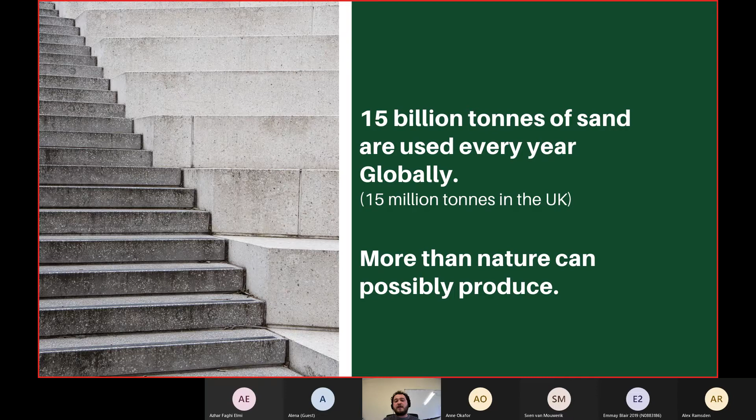So just a little bit about the two big picture global problems that we're trying to solve. The first is sand usage, which I'm sure probably some of you are aware of. The rate at which we're using sand that is suitable for construction is just far too much, and it's actually more than nature can possibly produce. So the world is actually, in fact, running out of sand, usable sand for construction anyway. So alternative materials are having to be sought after.

And a much more well-aware problem globally, and especially in the UK, we kind of see it everywhere now, is the problem of plastic and the fact that a lot of this plastic, in fact 91% of it, is still not actually recycled. And this is for numerous reasons. It can be that the plastic itself actually isn't recyclable, mechanically that is anyway, or that it's not desirable. The waste management companies have other streams of plastic that are worth a lot more money, so tend to focus on them.

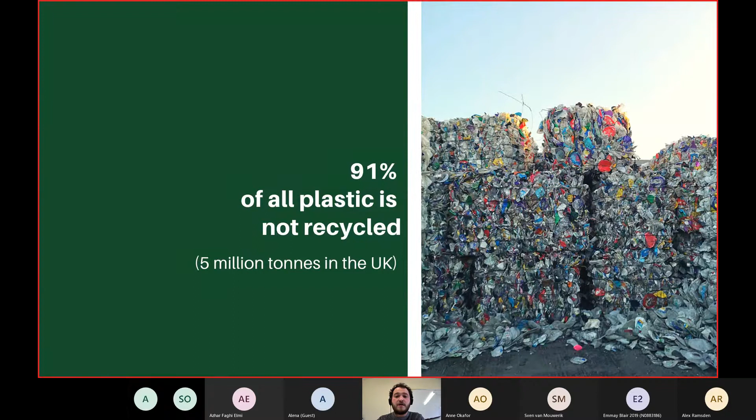So what we as Plastech try to do as a company is we take these sources of plastic that are either unrecyclable or undesirable to waste management companies, and we transform them into a material that can replace sand in concrete. And why you would want to do this, other than obviously just trying to look at uses for plastic, is that it actually improves the properties of the concrete. So it lightweights the concrete, it can severely reduce the carbon footprint of the concrete, and also add thermal insulation. And the process that we actually do for this, we have patent pending status on.

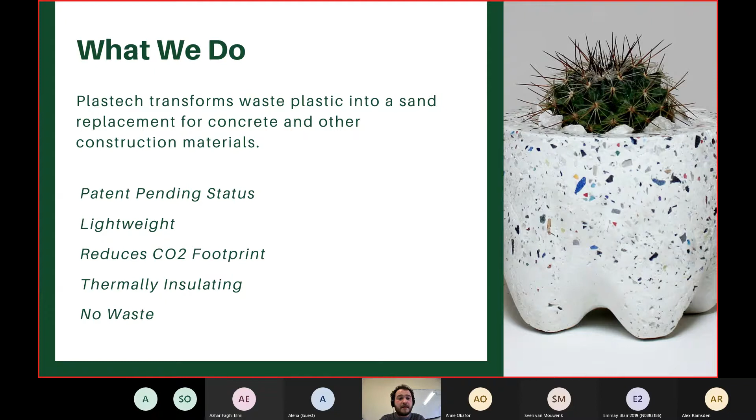So a little bit about the company and sort of what we are and where we came from. We're very much a startup company. We're a small team of 3 at the minute who all graduated Durham with PhDs in chemistry. We incorporated back in 2019, but we've really only geared up and been working full-time on the business since August this year. And that was because we actually came into some funding through Innovate UK and some venture capitalist funding that is actually funding the R&D research that we're doing at the minute.

And the process that we have developed to do this is we look at the input raw material. Like I said earlier, we try and focus on plastic that can't be recycled or that is difficult to recycle. And then we mechanically process it through steps that are very widely used in the recycling industry already, including a granulation step, which is where basically there are just blades that spin round that can size reduce material. And the reason why we do this is because a lot of the material that we get actually has to be pelletized. So usually plastic waste is either landfilled or it's sent for incineration. If it's sent for incineration, it actually has to be pelletized, so it looks like animal feed, into pellets so it can be burnt. So we need to break those pellets back up, which we do in this step.

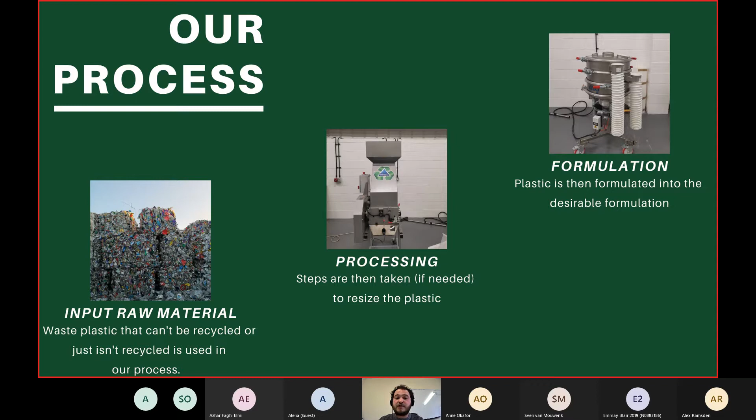And then we use simple mechanical methods to size separate and reformulate the plastic into a distribution that is suitable to be used in concrete. We then have our sort of special sauce step, so to speak, which the patent is on. So I can't really go into too much detail about that, unfortunately. But here, this is where we actually change the plastic so it can actually be used in concrete. Because if you were to throw just normal plastic into concrete, the resulting material properties aren't that great. And so we change the plastic so it can actually be incorporated into concrete and keep the material properties good.

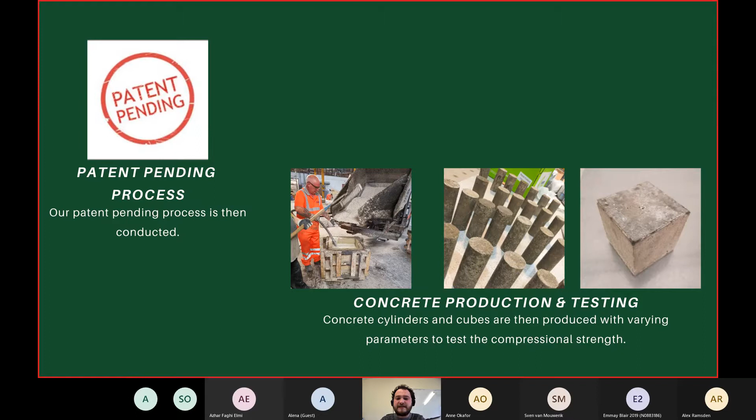And then obviously we do a lot of testing at the minute. So this is very much the stage that we're in. We're making a lot of cubes. I mean, a lot of cubes, and just testing the material properties with different formulations to try and optimize the mix designs going forward.

So the products we have in development at the minute, the primary one that we're working on is an ultra lightweight thermally insulating aggregate that we're looking to be used in blockwork and concrete masonry. So these could be replacements for your sort of aircrete blocks or your lightweight aggregate blocks that are used in a lot of house building.

And there's a lot of optimization that needs to be done, but already we're seeing that we're getting material properties out of this that are very, very similar to what's on the market. So we can get low densities, so they're easy to work with. We can get compressional strengths that hit the specifications needed for blockwork for housing.

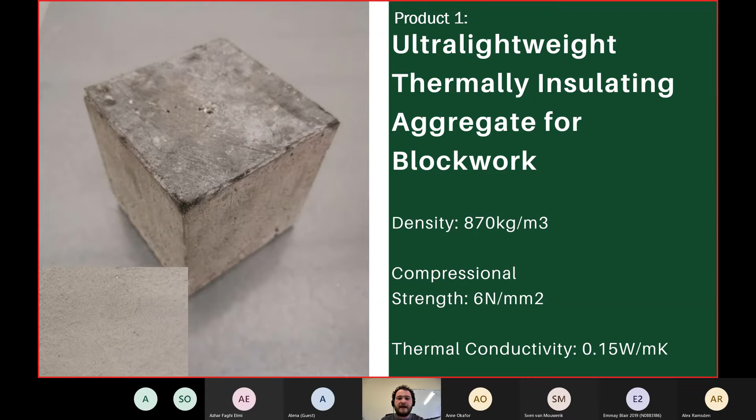And we're getting really low thermal conductivities, which is great because it means these blocks can be used as an insulating material. And as well, when we're looking at housing, that is a really desirable property because going forward it can reduce bills, etc., and energy usage in that way. So that's the primary project that we're working on and we're taking forward.

Another thing that we are also looking at, and this is sort of an outcome that we didn't necessarily expect, but we found when we started to use our material in the blockwork applications that it actually increased the curing rate of the concrete. And so we've started to look at optimizing this a bit further to look at creating an accelerated curing admixture, which would be more of an additive rather than an integral raw material of the concrete.

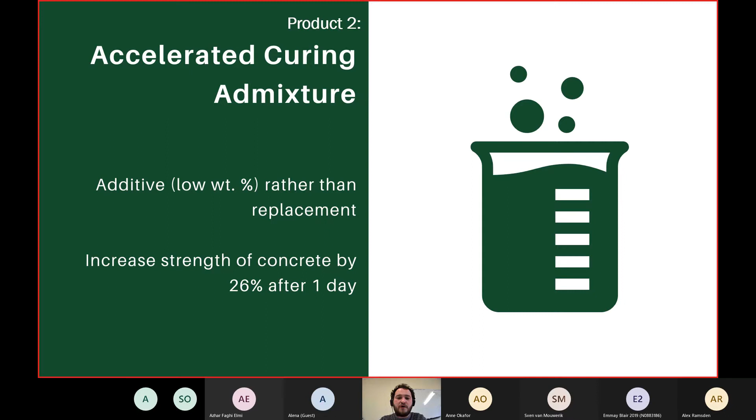And so far, like I said, very preliminary results, but we found that adding this additive, which again is made up of complete waste plastic, increases the strength of the concrete by roughly 26% after just one day. And so we're hoping to optimize this and get that percentage higher. But back onto the blockwork, which is what we're really focusing on.

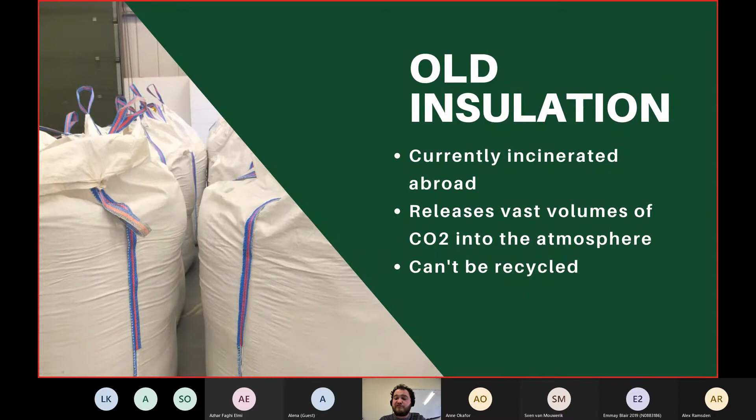The actual material that we use is old insulation. So a lot of insulation is plastic based, and it's a type of plastic called a thermoset plastic, which means it actually can't be remelted down. And because it can't be remelted down, it can't be used in a lot of the recycling processes that are present currently. And so therefore it is sent abroad to be incinerated. And when this material is incinerated, all that carbon that is trapped in the plastic is released into the atmosphere. So it's really not great.

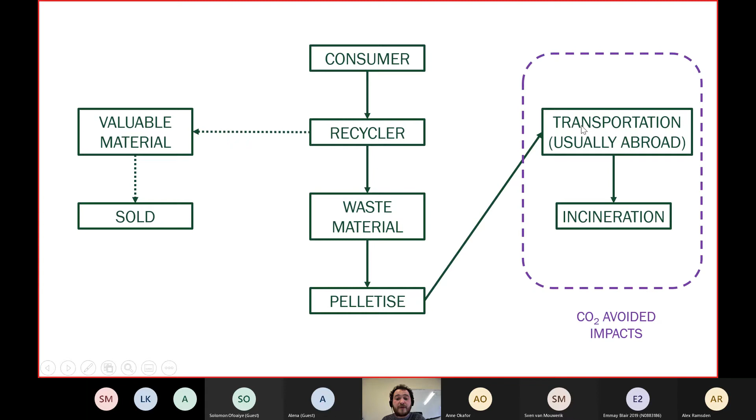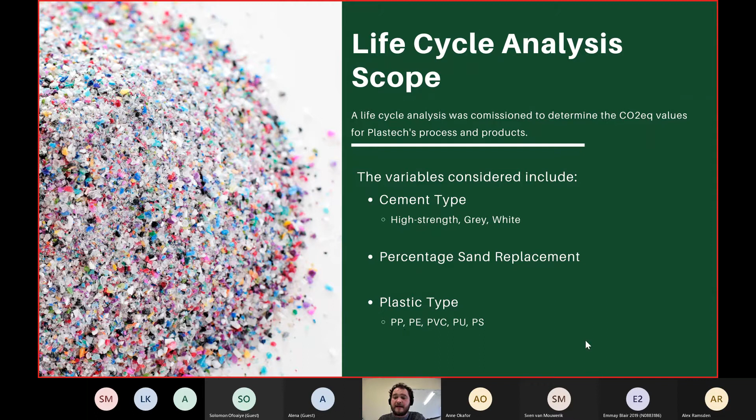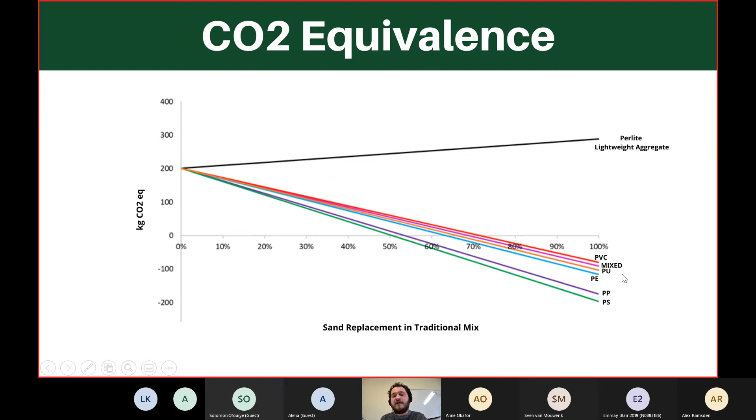One interesting thing to note actually is the blockworks that use these lightweight aggregates to improve material properties actually have a worse CO2 footprint output than normal concrete, and that's because these lightweight aggregates tend to be expanded clays, expanded fly ash, which needs really high temperatures and processing to actually create that expansion. So the more you use of this aggregate, you're actually increasing your carbon footprint. So with our lightweight aggregate, in comparison, you can rapidly decrease that carbon footprint.

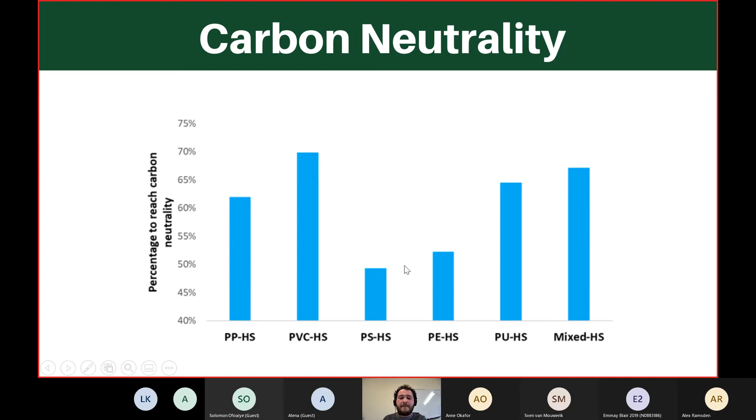So this is a bar chart just essentially showing the same thing but in a different format. So for each of the different plastics we looked at, polypropylene, polyvinyl chloride, polystyrene, polyethylene, polyurethane, and a mixed plastic stream, how much percentage of that material you would need to put into your concrete block to reach carbon neutrality. And you'll find it differs for the different plastics because of the different structures and the amount of carbon that each plastic actually contains.

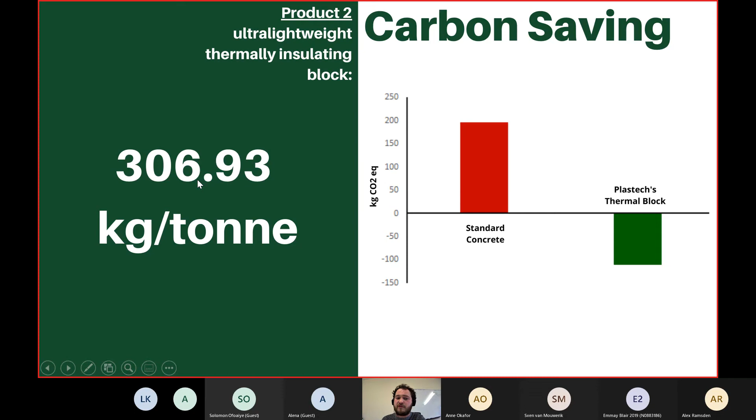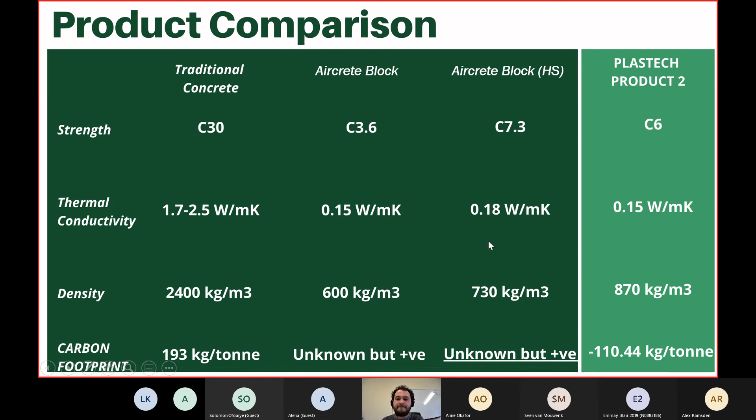So that's a little bit about where we are and what we're working on. But the next steps going forward for us are to continue the in-house testing that we're conducting. We've really started to go into our product development program at the minute, and we're hoping that we'll have a lot of the data in the new year. That is making sure that we can get the strengths, thermal conductivities, and the densities that are required for block work. And we also want to start looking at some small scale demonstration projects and prototyping with this type

of material. And then moving on to next year, we're looking at scaling up the manufacture of this aggregate so we can start to perhaps initiate some sales, which will be validation of not only the product, but also the business model that we're trying to create. But we know for bringing new materials into the construction industry, it is absolutely vital that we get the certification and the external testing for people to have confidence in the product.

And that will also include fire testing, which we need to perform. We're not too worried about the fire rating, even though it's plastic. The material we're looking at is inherently used in housing all over, because it's the insulating foam, and that is fire retarded to be used in that application. So we don't think we will have any problems with the fire rating, but we know it's something that we

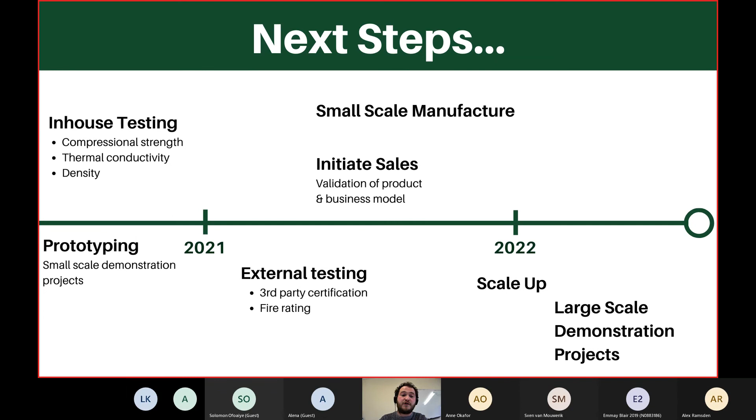And it just shows that being able to use materials from other industries that are problematic, if we can utilize them in concrete and in the construction industry, we can make really impressive, huge, sustainable improvements just because of the size of the industry that it is.